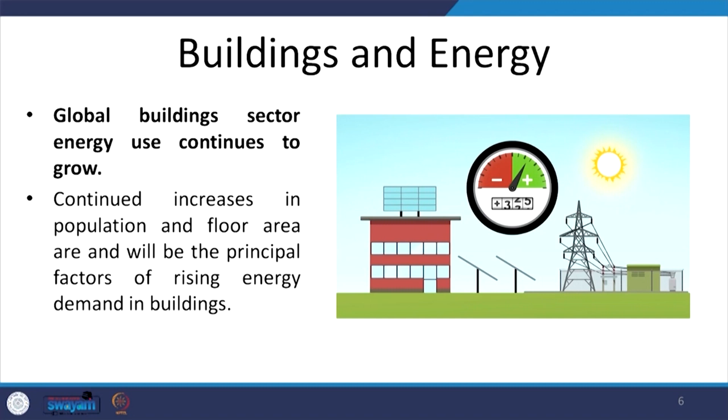Now, as population is increasing and the world becomes more urbanized, more buildings are needed and being added. Also, as our lifestyle is changing, we are becoming relatively distant from the natural environment, more confined indoors, and because of global warming, as temperature increases, energy use in buildings is increasing. It is also anticipated that this energy use will continue to increase for a few more years if we do not mend our ways.

If we look at the situation of energy consumption in the building sector in India, we see that the use of energy in buildings is continuously increasing, and a large portion of that energy is electricity which is required.

In India, as on date, electricity is still produced using the conventional fuel, which is coal. So majority of our electricity comes from thermal power plants, thus emphasizing the point that the fuel, the energy that we are using in buildings causes huge emissions to the environment.

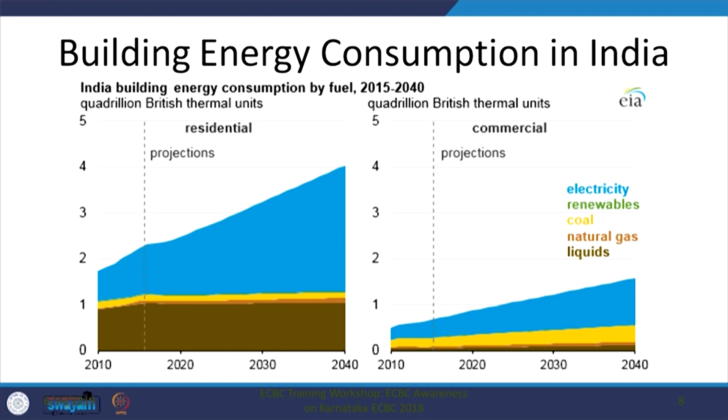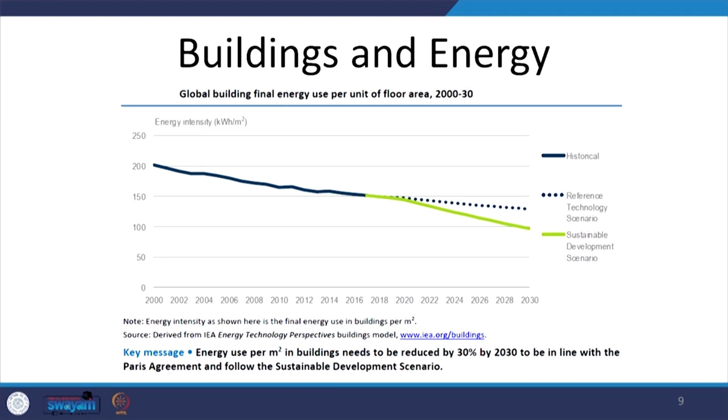If we look at the global final energy use per unit of floor area, if we develop all our buildings, the built environment, in a sustainable manner, that is when by 2030, which is the year by which sustainable development goals need to be achieved, that is how we will be able to reduce our per unit of floor area energy consumption.

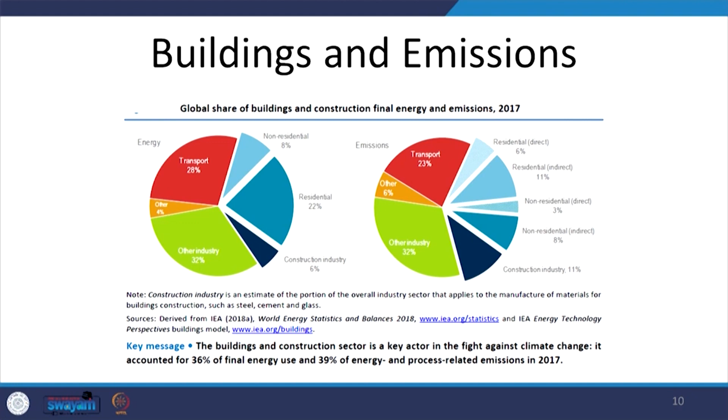That implies that our buildings, our entire built environment which is going to come up, has to be developed in a sustainable manner. If we also look at the global share of building and construction final energy and emissions, we see that around 35 to 40% of energy consumption and emissions are because of the construction industry and the buildings, which is a significantly large amount.

And also the fact that it is a low hanging fruit, because we can manage the demand side. We can reduce the consumption by virtue of the design and construction of these buildings and bring in a substantial reduction in the energy consumption as well as emissions through these buildings.

Buildings and construction sector industry are responsible for larger share of this air pollution because of the suspended particles, which to a large extent cannot be controlled. If sustainable practices are not adopted, it is a major cause of air pollution.

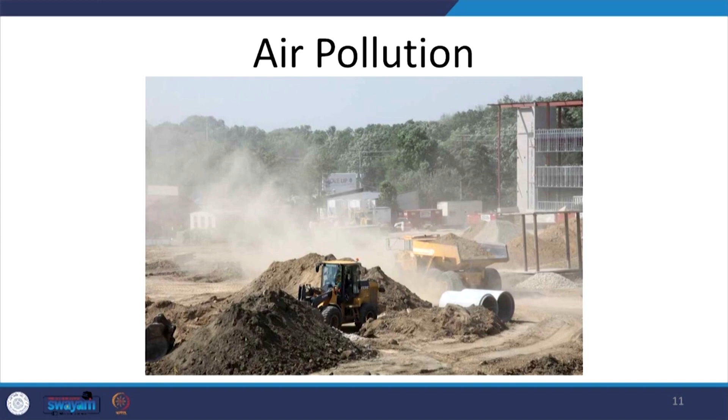Buildings consume high amount of material and resource. If we look at the kind of resource that goes into the buildings, we would also see that majority of the resources, materials which are being consumed in buildings are also highly energy intensive. For example, cement and steel.

Unfortunately, the practices for using locally available indigenous materials has substantially gone down. More and more of our buildings, because of the need for a global look, because of the need for global aesthetics, and also the usage, the need for going vertical, are consuming materials like cement and steel.

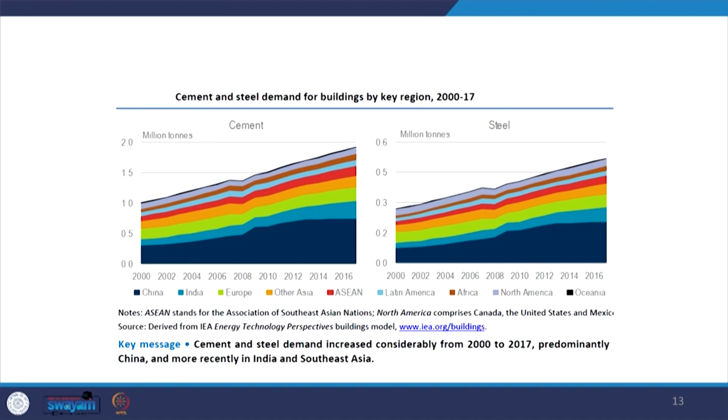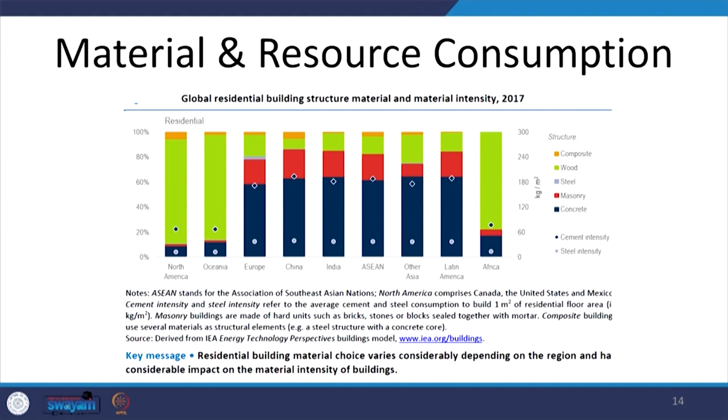If we look at the use of different materials in residential building structure, that is concrete, masonry, steel, wood and composite, we see that the share of concrete is substantially large. Majority of the buildings consume concrete for their construction, which, as I just said, is highly energy intensive and puts tremendous pressure on the global resources.

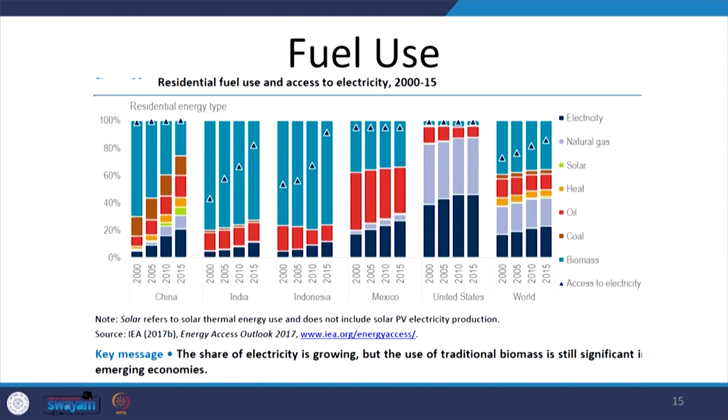If we look at the use of fuel in residential buildings and we focus on how the world has access to electricity, looking particularly at the case of India, we see that more number of residences now have access to electricity, which implies that for a developing country like ours, as the access to electricity increases, the overall consumption of electricity in residential buildings increases, and that puts an increased pressure on the resources.

Our demand is increasing. As the access to electricity increases, the lifestyle changes. Instead of using manually operated machines, we are depending more and more on electricity operated machines, and our dependence on electricity as a fuel and our overall lifestyle, that is changing. So buildings, the share of energy consumption is increasing.

Another very important area is the use of water in buildings. Buildings, by virtue of the fact that they house people, that they provide shelter to people, and people need water essentially to survive, are major consumers of water.

Now, unfortunately, besides the consumption of water by the human population, a major portion of the water turns into wastewater and it is not properly treated. That is what needs to be checked. So besides consumption by human beings, water is being converted into wastewater, and there is also wastage of water through leakage and a lot of other such means.

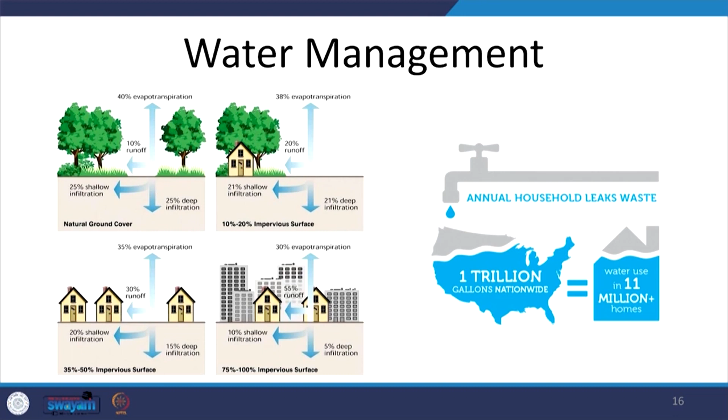This particular picture on screen is for the US, where because of household leaks, 1 trillion gallons are wasted every year, which are sufficient enough to be used in 11 million homes within the US. Now, that is a situation almost across the world.

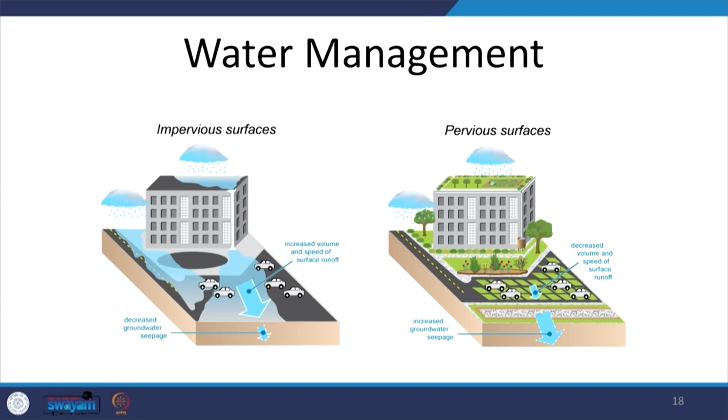Another reason is that more and more of the urban areas, developed areas, are becoming hard and impervious. That leads to increased surface runoff, thereby reducing the groundwater recharge, percolation to the ground, and reducing the overall moisture content, which is required to support greenery.

And that is a cycle which we have seen in yesterday's lecture, how it impacts the overall ecosystem, and cities after cities are eventually turning barren. There are several classic examples of cities becoming defunct simply because there was no water available. Detroit is one such example, where because of over exploitation of water resource, the entire city was abandoned.

At one point of time, Detroit was economically a very flourishing city where majority of the car companies had established their industries. But because of inefficient use of water resource, there was no groundwater available for people to drink and survive, and people fled the city. The city was abandoned for several years, decades, before nature took its own course and recharged the groundwater, and the entire ecosystem sprang back, and now people are moving back to the city.

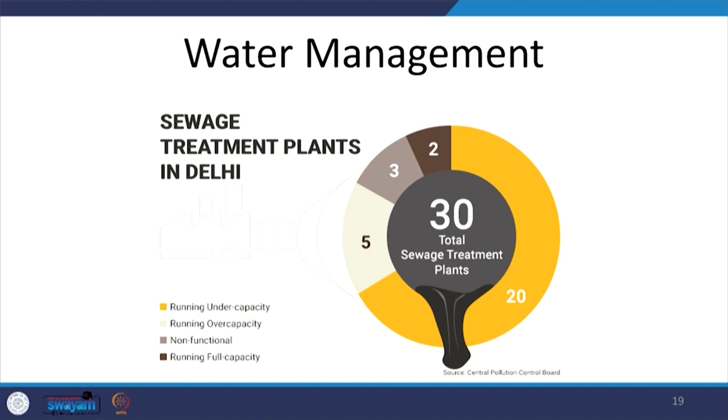So we need to sustainably manage our buildings, to design our buildings, to use resources like energy and water through mechanisms like sewage treatment plants. Besides managing the resources, the planning has a major role to play.

Such problems are common and on the rise across the world, not just within the country. Every monsoon, every time the rains come, we hear these news and reports where some city, or at least few areas of a city, get flooded simply because the planning has not been done properly. Low-lying areas, which were actually used to collect rainwater so that it could percolate into the ground, have been encroached upon for building construction, and that is why no water percolates to the ground. The groundwater is receding, going down, and the city gets flooded every monsoon.

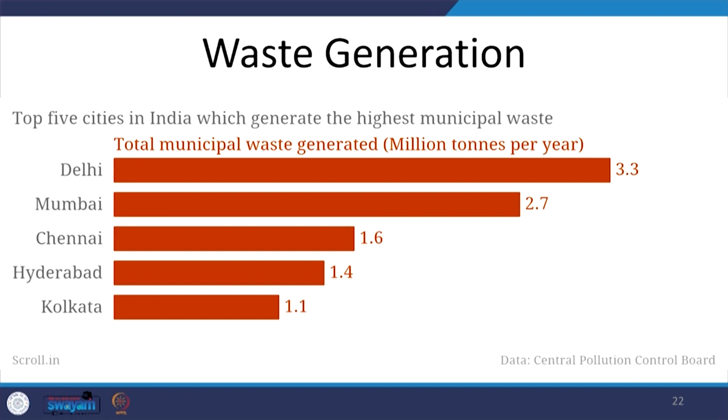The problem is so serious and grave that besides environmental problems, it is leading to a lot of social and health problems. People are picking up more sicknesses and illnesses, and we see that Indian cities are generating very high amounts of municipal waste because it is not being treated sustainably.

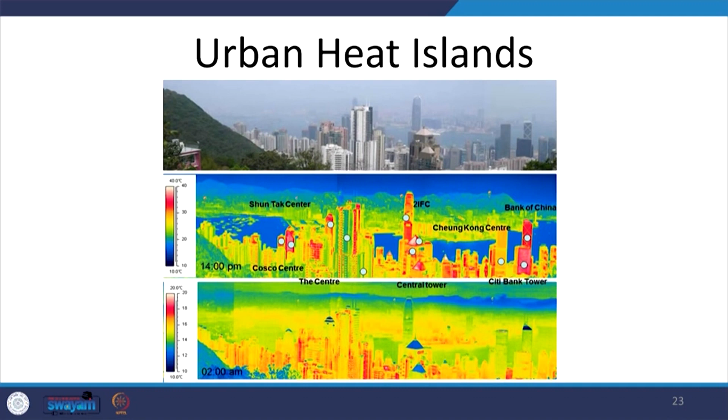Another problem, as we have discussed earlier, is the urban heat island effect. We were discussing that if you move into a city like Delhi from the surrounding suburban areas, we can immediately feel the difference in temperature, which is because of the high concentration of hard and impervious surfaces in the city.

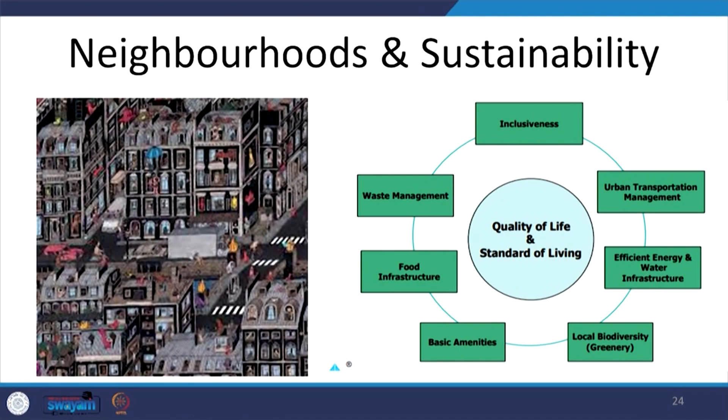We are also looking at the social aspects where we talk about neighborhoods and sustainability. So we are not just looking at environmental or operational aspects of buildings, but at the quality of life and standard of living through a sustainably planned neighborhood or settlement.

We are also looking at inclusiveness. We are talking about urban transportation, which needs to be managed in a sustainable manner. This is required for ensuring the quality of life for all citizens. Everybody needs access to open green areas for a minimum standard of quality of life.

Besides these, we also need to protect the culture and identity of a place. That can only be done through sustainable development of the built environment. We are not just looking at the technological aspects of managing water, energy, and waste—we are talking about the socio-cultural identity, continuation of the identity of a place. That can be responsibly done if we develop buildings in a sustainable manner.

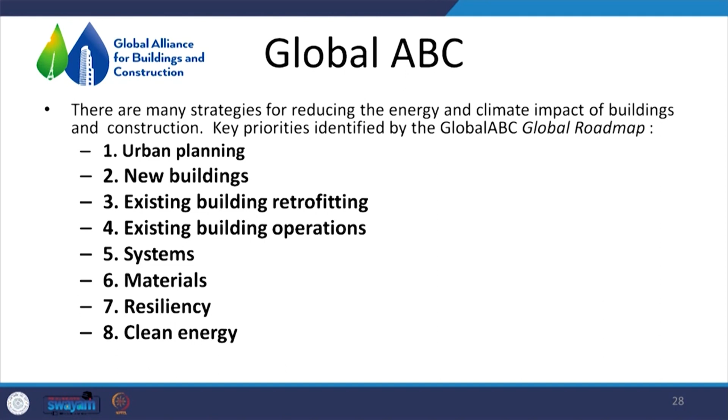As identified by the Global Alliance for Buildings and Construction, there are many strategies for reducing the energy and climate impact of buildings and construction. The key priority areas identified by Global ABC are urban planning, new buildings, existing building retrofitting, existing building operations, systems, materials, resiliency, and clean energy. All these are encompassed within the larger domain of sustainable architecture, sustainable built environment. That is why we need to develop all our new upcoming buildings and convert our existing stock into sustainable buildings.

Starting from week 3, we would come to the specific understanding of what sustainable architecture is and how do we design and construct sustainable buildings.